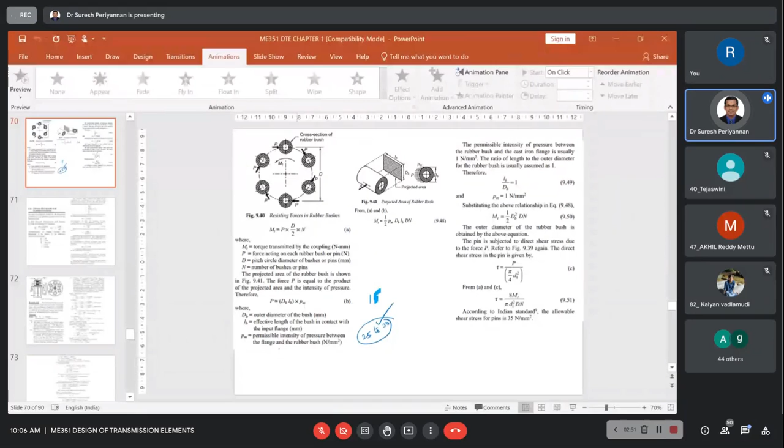I think in the last class we discussed up to this, the flexible coupling topic. Once we complete this, we'll move to today's gear topic, the next chapter on gear design. That's the plan for today.

Just to recap, this is also what we discussed in the last class. First couple of minutes we'll recap this, then go further into the design concept and corresponding problem, then move to the gear topic.

Now see here, this is the flexible flange coupling. Whatever we discussed earlier - rigid coupling, clamp coupling, sleeve and muff coupling, and flange coupling - these sleeve coupling, clamp coupling, and rigid type flange coupling are under the rigid type coupling. Now this is a modified version of the flange coupling.

This is flexible coupling. What are the components very important while designing the flexible coupling? The bush, pin, and the lining, brass lining - these are the important components while designing the flexible flange coupling.

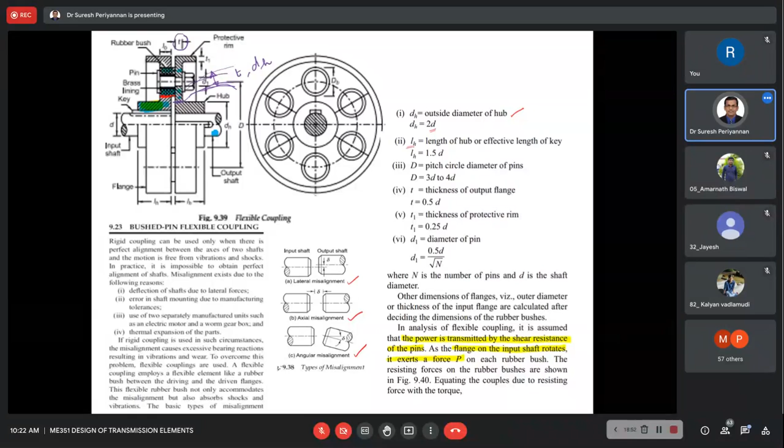Then what is the area? This junction is subjected to - from this design data book, they suggested that this junction is subjected to shear. Then the area subjected to shear is pi DH into T.

Now what is the torque? This resisting torque is equal to DH by 2. This must be equal to our transmitted torque. Now from these relations, we know the DH value, we know the T value, we know most of the values.

We are only going to find out if this tau is within the limit or not, within the safe limit or not. At the junction, the shear stress - the flange coupling subjected to shear stress - is within the safe limit or not. That is our intention.

Now I come to the diameter of the pin. This is a standard empirical relation. This is the pin diameter - how to find out the pin diameter. This is it.

Here we are doing cross verification of the shear stress component. Suppose we can do cross verification through this way also. We can find our diameter of the pin.

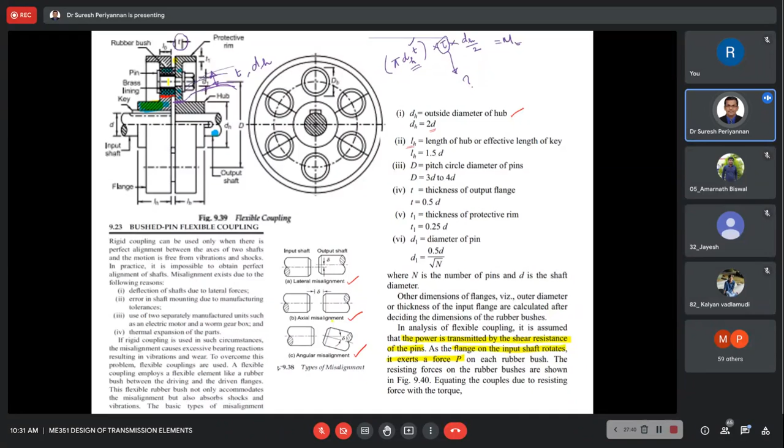That also we have to consider in our design process. Now I come to the problem. Now this is the keys, and here, this is the pins. The keys are subject to shear and compression. Pins are subject to shear and bending. That's all - pins are subject to shear and bending stresses.

On the basis of this, there's yield strength criteria: 400 Newton per mm squared when we are considering grade 30C8, selected for keys and pins. The factor of safety for the key and pin is 2. Similarly, the compressive yield strength we are assuming is 150% of the tensile yield strength. Compressive yield strength is always higher than - here we are considering 150% of the tensile yield strength, not always higher. Based on our design approach, we have to consider this.

Here we are considering 150% of yield strength, 1.5 times into 400, when we are finding the compressive yield strength.

Now the flange is a complicated shape. The flange material is now gray cast iron. The ultimate strength of the flange is 200 Newton per mm square. Now this is the justification, and the factor of safety is 6.

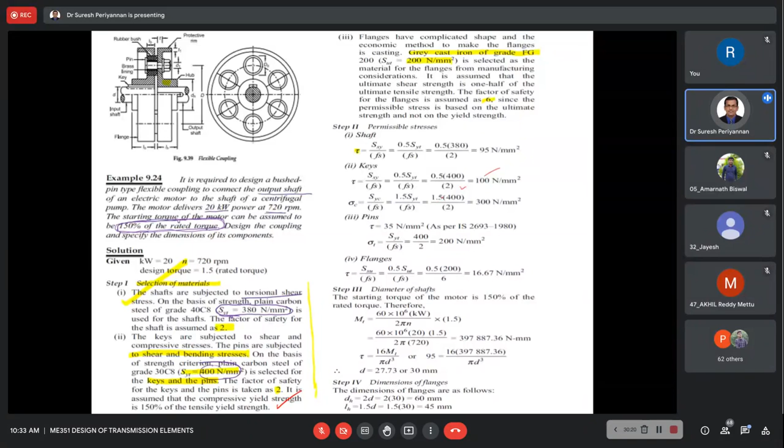I mean 200 Newton per mm square. So, 400 Newton per mm square divided by 2, I mean 100 Newton per mm square. Then crushing stress also given here: now, 1.5 times into 400 divided by 2, equals 300 Newton per mm square.

And the pins also, tau is given. Tau is already known - as per the Indian standard, we know that 35 Newton per mm square, what we discussed earlier.

Now come to the flange. From this justification, we are finding this permissible stress value for the flange. Now let's go step by step for the design of the flexible flange coupling.

The power is given, 20 kilowatt, but we are multiplying by 1.5 because of rated torque - the starting torque is 1.5 times of the rated torque. Based on that, we are finding the torque transmission capacity of the flange coupling.

Once we know that, from this we are able to find out the diameter of the shaft: 16 Mt divided by d cube. These are known formulas. So finally, this is the diameter of the shaft.

Once we know the diameter of the shaft, we go use the empirical relations. Then find the hub diameter and the length of the hub. Hub diameter is 60 mm, length of the hub is 45 mm, the pitch circle diameter is 120 mm, the flange thickness is 15 mm, and the thickness of the protective rim is 8 mm.

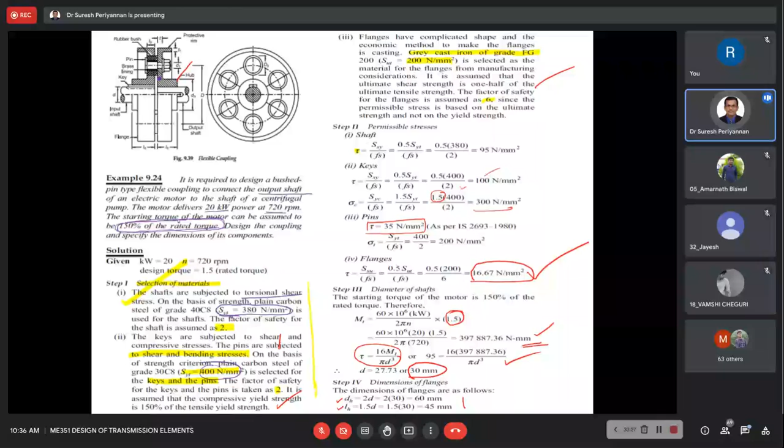2 Mt divided by dh squared t. We know dh because these are obtained from the empirical relation. Hence we would like to verify the stress limit, the actual stress induced in the junction. This comes to 4.69 Newton per mm squared, which is less than our permissible limit.

This is with respect to hollow shaft design, at the junction of the hub and flange. This value, 4.69 Newton per mm squared, is less than our permissible limit.

Now come to the diameter of the fin/pin. Number of bushes are 6. From the empirical relation this is 7 mm. This is the pin diameter based on the empirical relation.

Especially in flexible flange coupling, we would like to use bending stress also to design our flange coupling components. Later we are going to apply and discuss the bending effect. Based on bending stress, we are going to define the pin size. I will come to that later.

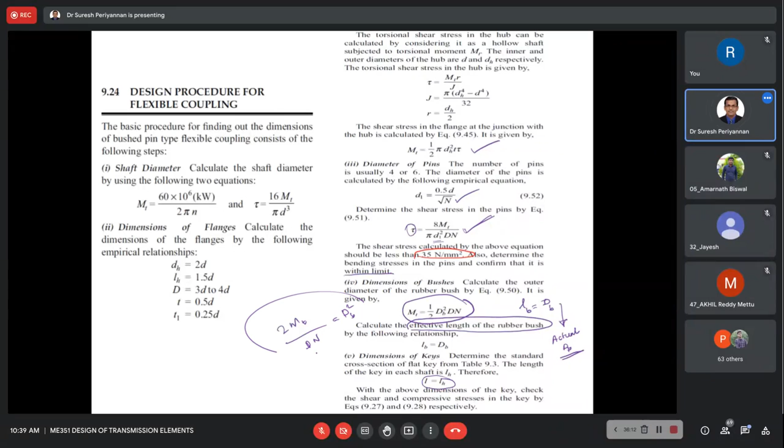From this relation, 2 Mt divided by d n equals db squared. From these relations we are able to find out the diameter of the bush and length of the bush. This is the effective diameter of the bush; the actual diameter of the bush we are going to discuss now.

Now come to the bending stress induced in the pins. What is the bending stress induced in the pin? This is the load, as we already discussed, P into the force exerted from the shaft to bush, and this is the number of bolts. From this we are able to find the force exerted on the bush, on the pin through bush: 1105 Newton force is exerted on the pin through bush.

Now see here, we can see separately a schematic diagram. This is the bush, this is the liner, brass liner, this is a bush, this is the flange, the driving flange, and this is the output flange, the driven flange. As per the effective length calculation, this is 35 mm. This gap, as I told you, is required for managing our misalignment, 5 mm. So this total length is 40 mm.

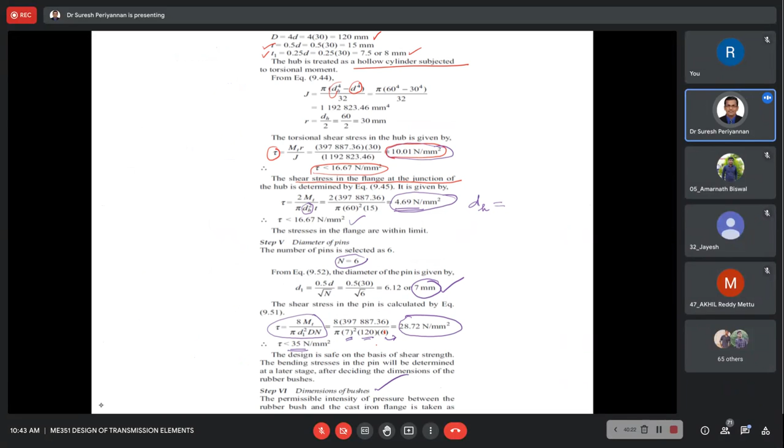Earlier we found this pin diameter as 7 mm. Now if you consider 7 mm in your design, then your pin is unable to withstand the bending stress. Hence we have to consider 12 mm. If you consider 12 mm pin diameter and substitute that value, still your shear stress in the pin is less than 28.72.

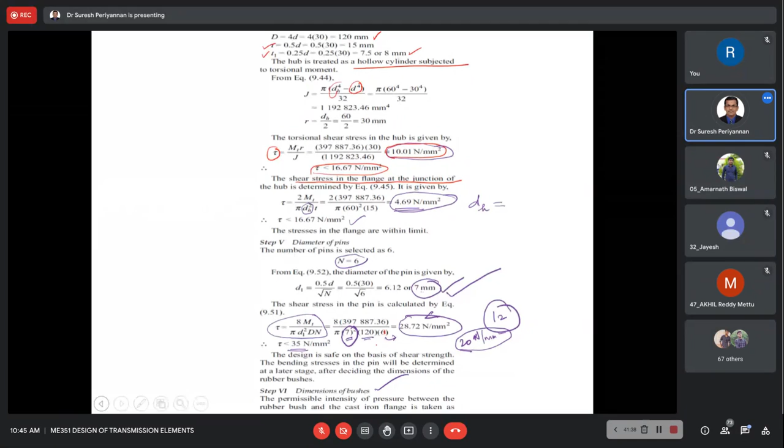As compared to, for example, say 20 Newton per mm square - I'm not telling the exact value - when you put 12 mm instead of 7 mm, your stress value is less than this, so it's still within the permissible limit, even better, when we are going for more diameter of the pin. So this way we have to compare the design when we are designing the pin dimension based on shear stress as well as bending stress. You may expect this kind of question in the objective type.

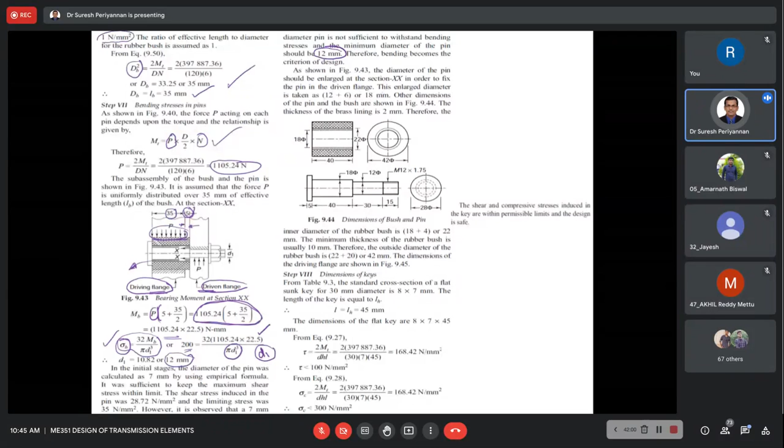Okay, now that's what we are considering: pin diameter is now 12 mm. Now come to the actual condition of the design. The pin diameter is 12 mm. What is the enlarged diameter? Now we are talking about this dimension.

Actually, for this enlarged diameter, we are considering 12 plus 6 mm. In the upward direction 6 mm, downward direction 6 mm, so 12 plus 6 becomes 18 mm - the pin diameter at the enlarged end. Here is 12 mm, here is 12 mm. The length we know is 40 mm, 35 plus 5 equals 40 mm.

Now I come to the bush dimensions, axial bush dimension. The inner diameter of the bush is 18 plus 4 mm, which is 22 mm. Why 18 plus 4 mm here? Because we are using a bush, sorry, we are using a lining - brass lining.

This depends on the lining; the data might have been taken from the data book. Here we are using lining of 2 mm, the top lining 2 mm, the bottom lining 2 mm. Then for the actual design of the bush, this is 22 mm - the inner diameter of the bush is 22 mm.

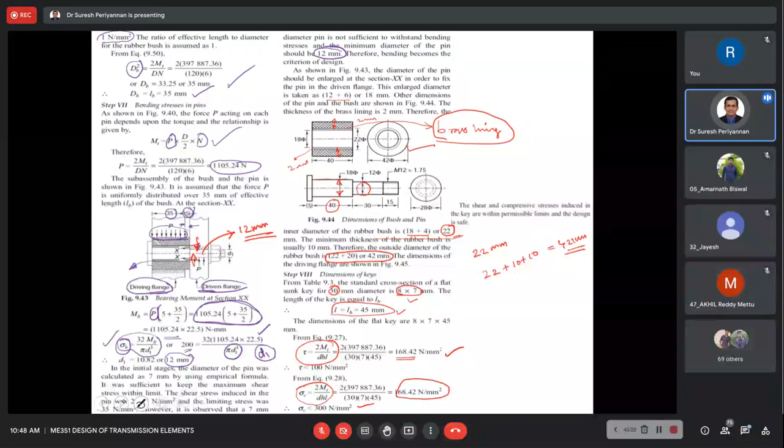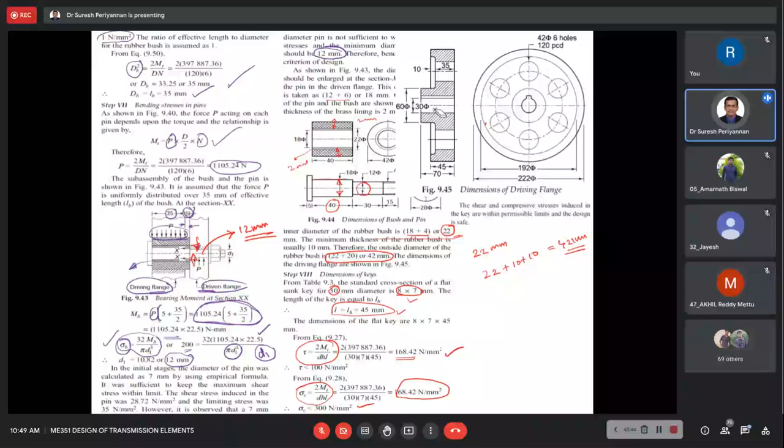So now we have completed this. Now we have to draw the diagram, since in the exam we may be asked to draw it. Practice drawing it in a way that isn't too complicated with three-dimensional views. Mostly concentrate on the bush dimensions, pin dimensions, outer diameter of the flange, and hub diameter. This is how you should reflect it in your answer.

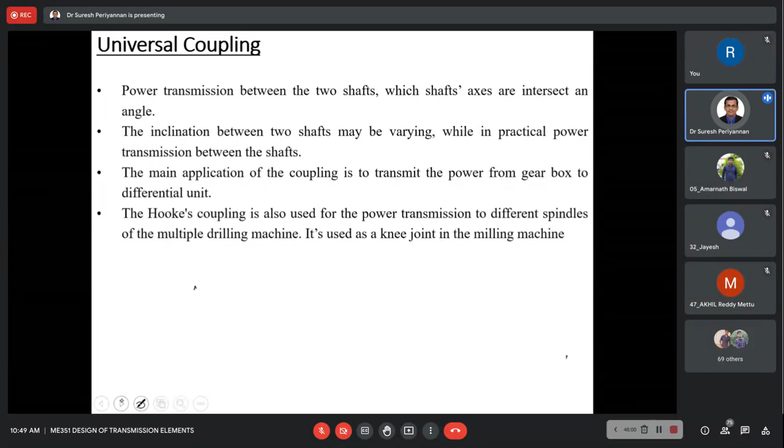Now, universal coupling, just go through this, I have attached the slides here. Wherever the shafts are intersecting, we use universal coupling. This is very simple, and the procedure is also the same here. The equations are given for torque transmitted by the shaft and torque transmitted by double shear on the pin.

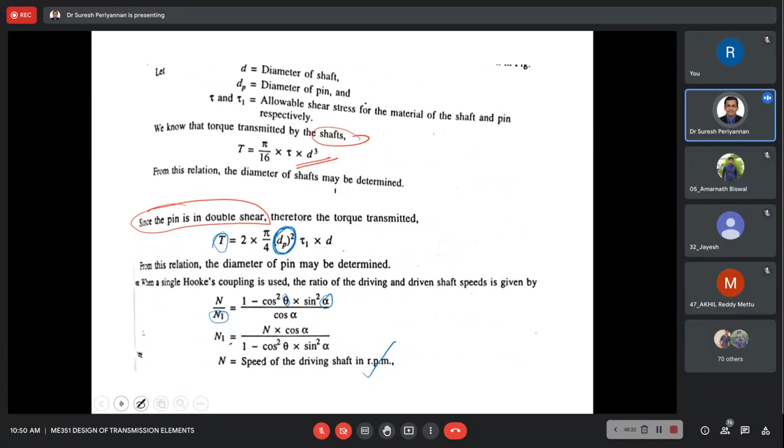Anyway, what we are going to cover is what we discussed - clamp coupling, sleeve coupling, rigid flange coupling, and flexible coupling. Only that will be covered in your syllabus and in your exam. This universal coupling is just for your understanding.

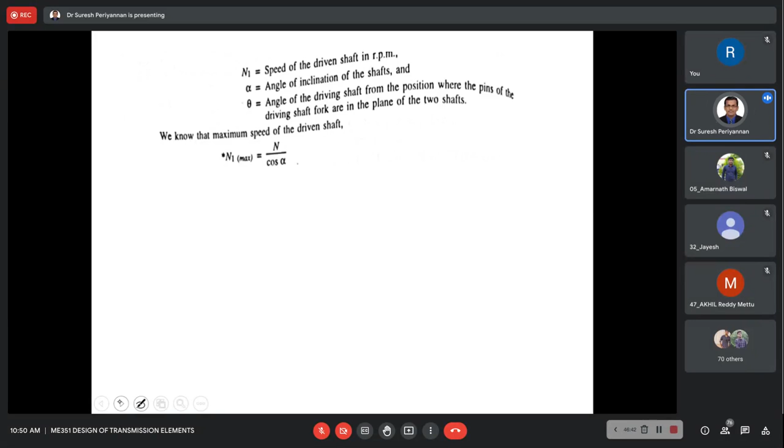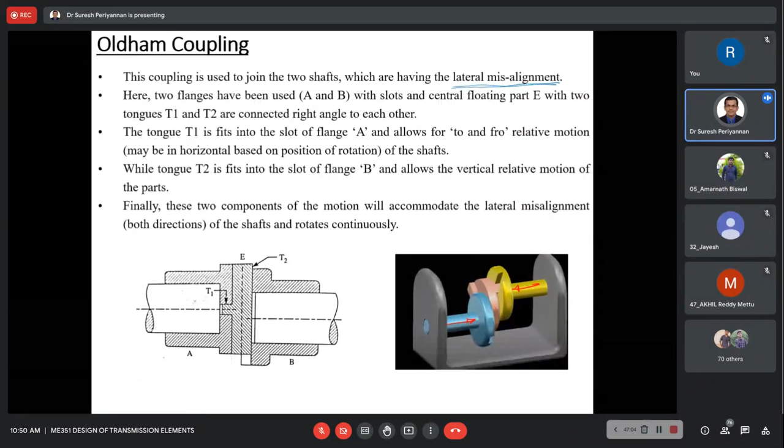This is Oldham coupling. Wherever the shafts are offset in distance but both shafts are parallel, Oldham couplings are used during power transmission for lateral misalignment. This kind of coupling is very useful. Just go through this point, I have written it in a simple manner so you can easily understand.

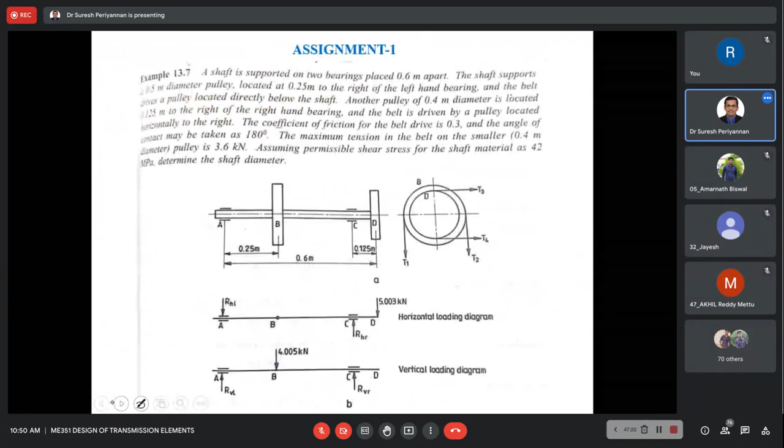This is the summary of this chapter, covering the formulas we discussed so far. Some things I didn't cover here, like the rigid flange coupling and flexible flange coupling formulas. Anyway, go through what we just discussed. If you have any doubt in this problem or in this chapter, please ask. Now we start the next chapter.

At least we have to start the topic.

Any doubt? How many students are there? Oh, sir, 76. Okay.

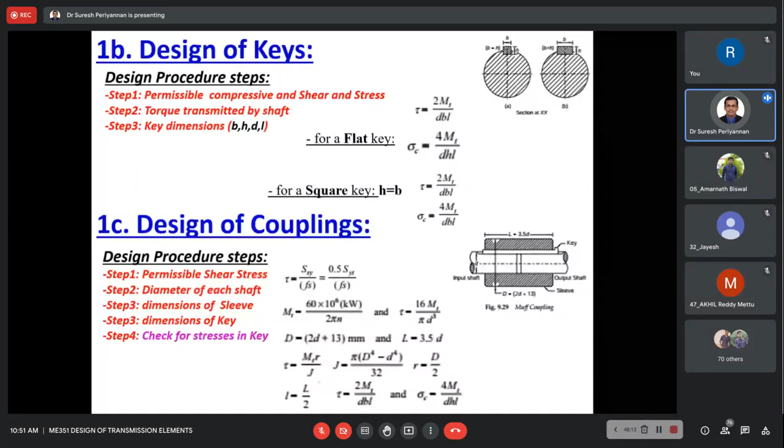Okay, come to gears. What is a gear? You might have studied this in the basic mechanical engineering subject in your first year, right? What is a gear? Yeah, please reflect.

Just a brief conclusion about the first chapter. In the first chapter, we discussed the keys - sorry, we started with solid shaft design, then came to hollow shaft design. Then we discussed keys, different types of keys and design of keys, and the hollow shaft and solid shaft under different load conditions - torsion, bending, and tensile. There were three ways we discussed: one based on strength, the second based on lateral rigidity, and bending, torsion, and combined effect. We discussed the design of the shaft, both hollow and solid, and later the keys - especially flat key, square key, splines, and also Kennedy key design. Later we discussed couplings, different types of couplings.

Okay, now we move to gears. Please reflect your answer - what is a gear? I know you know about gears, but I'm expecting your explanation, a brief explanation.

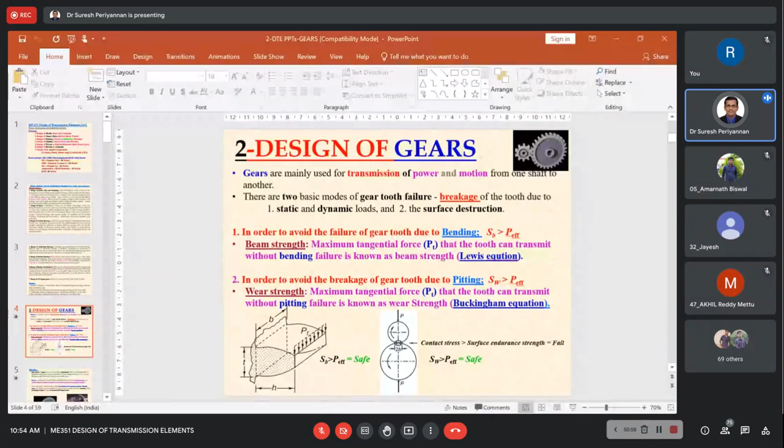Second case is surface destruction, surface destruction - this is the surface. Now there are two ways we are going to discuss in very detailed manner the gear design: one is bending, another one is due to pitting effect.

One is gear tooth failure due to bending effect, and the second one is gear tooth failure due to pitting effect. We will discuss what pitting is - I will tell you later. Just keep it in mind for now.

In order to avoid the failure of the gear tooth due to bending effect, SB must be greater than the effective load, P effective. Now SB is nothing but beam strength - the maximum tangential force, PT.

Where is the maximum tangential force? This is the maximum tangential force, PT - the maximum tangential force that the tooth can transmit without bending failure is known as beam strength. How can I say this is bending strength?

See here, this looks like simply a cantilever beam concept - the beam. One end of the teeth is fixed, the other end is where the load is acting. This is nothing but our beam length. For H, if I turn it 90 degrees, that is the height of the gear, height of the teeth.

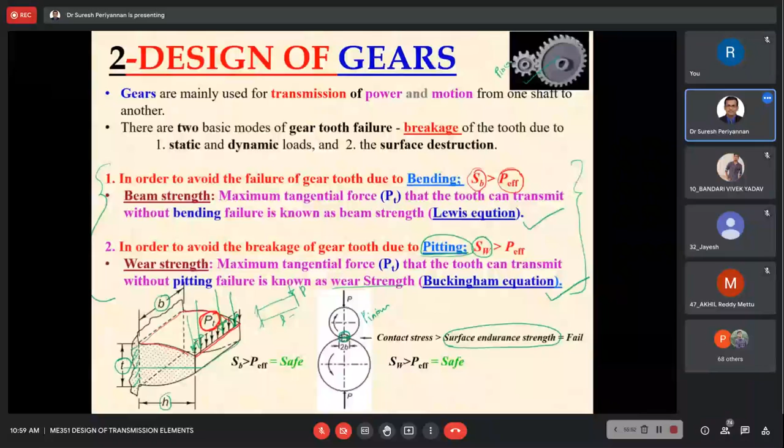These two things are very important, and we are going to discuss them later in detailed manner. Now, what type of gear is this? This is a spur gear - the bigger wheel is called the gear, and this smaller one is the pinion.

As I told you what a gear is, someone reflected a very good answer. Now we'll go through some basic explanation, then we enter deeply into the design of gears.

Now, what? It's 11 a.m., sir. Okay, thank you.

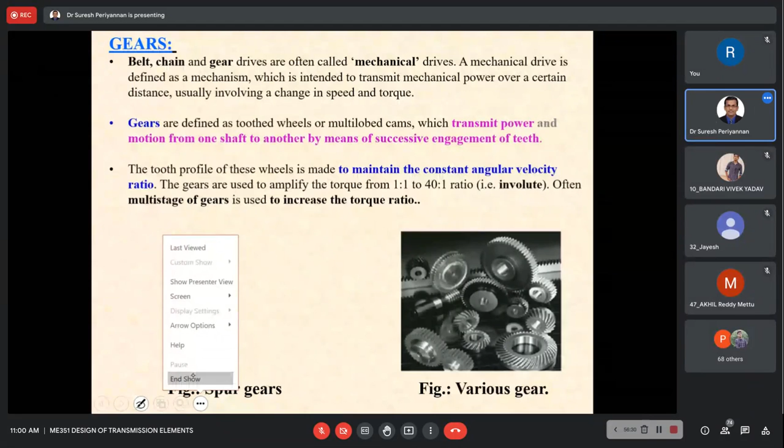When is our CR meeting? Around February, sir. Okay, please go ahead if you have any doubt. No doubt, sir. Okay guys, thank you.